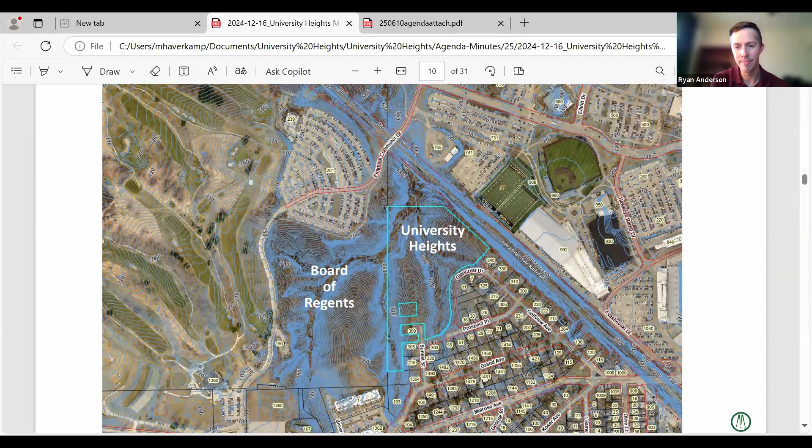Next slide. I mentioned we did walk the existing social trails - those are marked out in dark green dashed lines here. We have GPS software; a lot of bicyclists may know Strava. We used that to mark the trails, so we could understand what it feels like to walk them, but also see what that looks like when you lay it across an actual map, which is what we use for our design efforts.

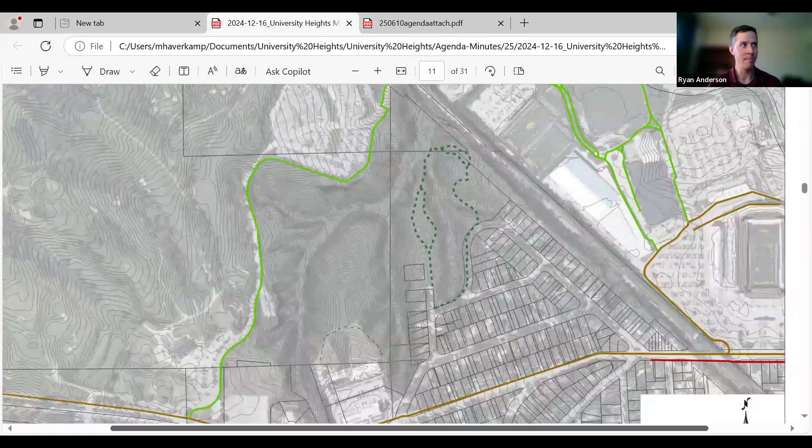Of note, the existing trail follows along the center spine of existing topographic lobes out here, because that's easier to lay trails out on. As we talk about sustainable trail infrastructure from an environmental standpoint, it's maybe counterintuitive, but it's actually better to land on either side of those lobes, because water moves faster across those areas and isn't effectively funneled down the center line of the trail, which can cause long-term washout.

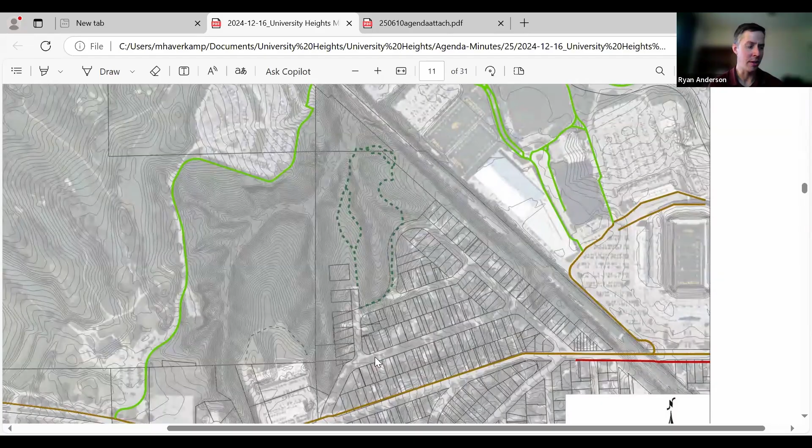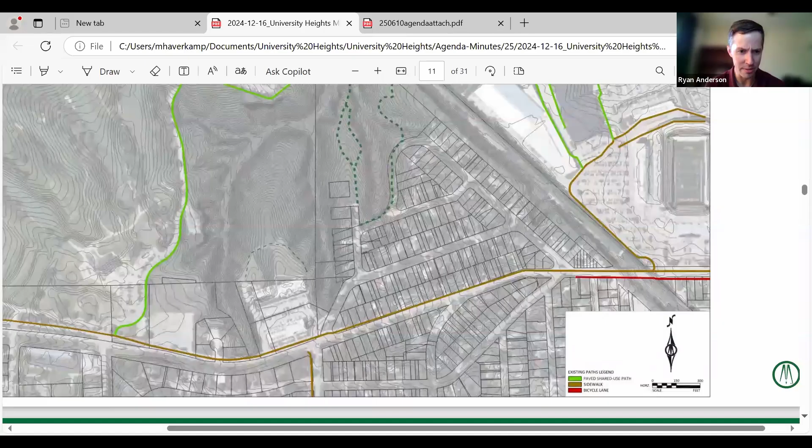So again, that's just what's out there today. Next slide. One moment - worth noting, the lime green to the west is an existing off-street trail that wraps around the forested area there. Also showing some other local off-street trails in brown on Melrose to the south - some adjacent trail connection opportunities.

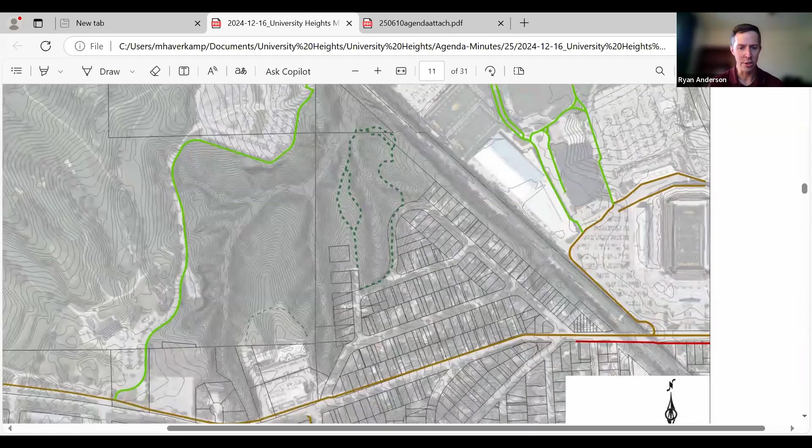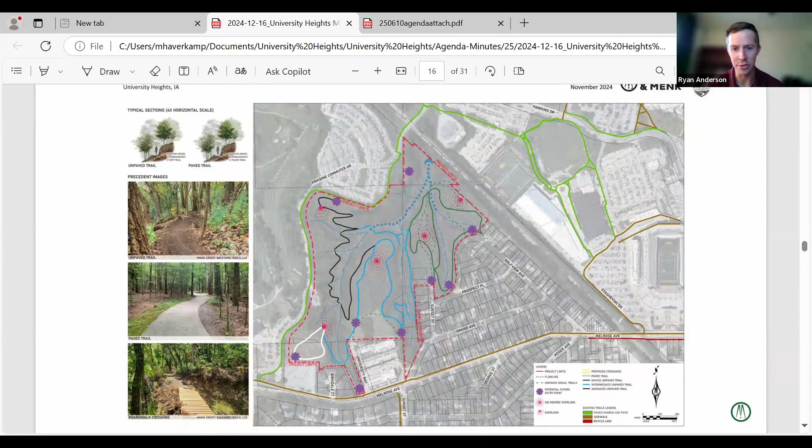So this was our first crack at laying out different trail alignments with consideration of topography, existing water, those different view sheds, and then of course the different site points of entry. Let's jump to the next one.

You can see there's some similarities between these two. Generally easier trails on the east portion of the site. The blue trails here in the middle are significantly different. They originate from either side of the northern One University Place building, and then basically loop out to the end of that lobe where there's a nice view shed opportunity, and then loop back. What's nice about that is there's not much water crossing. And then again, with the black trail here, instead of following along the low point of that ravine, trying to get up a little bit higher and work around these different areas closer up to the road.

I should mention on the left side here, just some examples of what a dirt trail looks like. That'd be something like you'd see in the green there. Paved trail in the middle is concrete or asphalt, and then boardwalk crossings in the bottom left there. That was actually constructed by Backyard Trails. Forgot to mention also at the northern limit of Sunset Street, there's a white paved trail. So it was important to us that there was a paved trail portion as part of each of these concepts that'd be fully ADA compliant. And so that was another primary differentiator between this concept and the previous concept one.

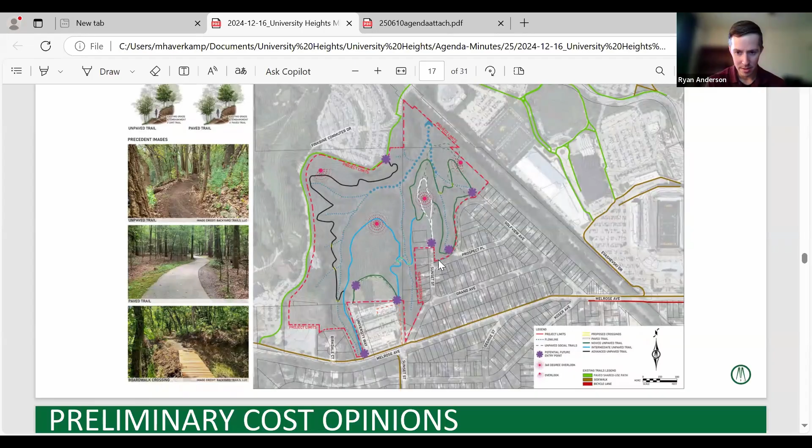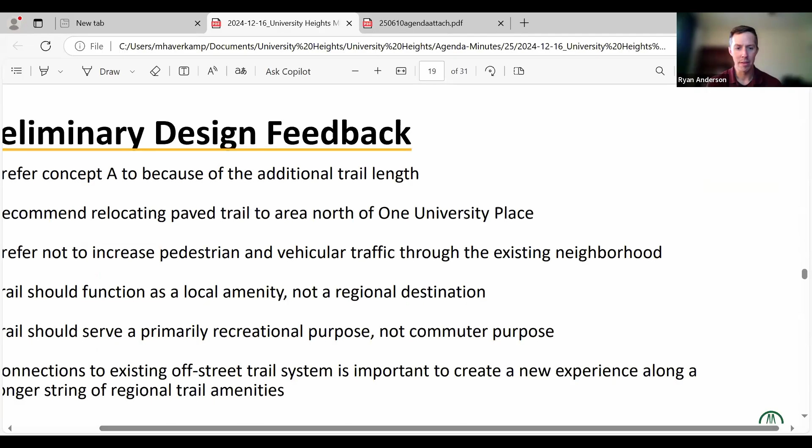If you jump to the next slide. When we talked through the two different concepts, here's where we kind of landed for direction in the final. Again, A had more length. Figured if we're going to do this project, we should do our best to optimize what we have and get as much trail in as we can. There was a strong preference to get the paved trail away from that southwest corner to facilitate future development in that area. And so that trail actually was proposed to be relocated on that loop that's north of University Place, which you'll see in the next concept here.

There was a preference not to increase pedestrian and vehicular traffic through the existing neighborhood. So we're not necessarily highlighting on-street trails on already narrow streets through this neighborhood. Don't want this to feel like a neighborhood that's also a highway. So the trail should function as a local amenity and not a regional destination. I think Josh kind of prefaced that as well.

There's a lot of really great mountain bike opportunities in this area. And while this will be a great amenity in addition to that larger system, this is different than something like the Ice House, where it's less mountain bicycle centric, really more about getting people out and into the woods and able to go for a walk. That's important to recognize, I think, with the University of Iowa as well, with all the students that navigate these different areas, trying to design in a way that is, again, socially sustainable, making sure there's not people moving at high speed on a bicycle next to people that are not while they're walking.

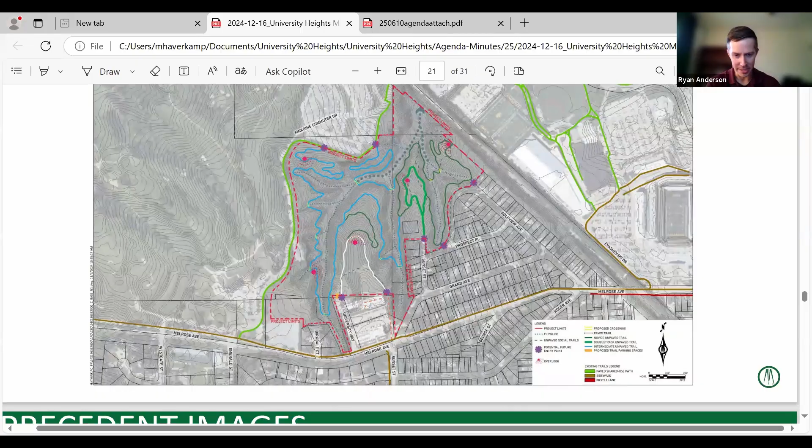So this is kind of the same song, but with a preferred concept. It's really a melding of concepts 1 and 2 previously. I'll highlight in particular that white upside down U shape extending from the east and west edges of the northern residential building.

That seems to be an area where it's easy to provide some level of vehicle access on the west side, highlighted in orange. So you have a truly accessible parking space which lets you get out into the woods and make a return. That also interconnects with the larger trail system, which has been aligned with existing topography to be both sustainable and cost effective, really optimizing the amount of trail without having to construct a lot of boardwalks or navigate steep slopes.

You'll see there's no longer any black on here, again thinking about making this available to a wide range of users, wanting to top it out at that blue designation. The dark green are going to be more similar to what's out there today, relatively narrow dirt paths, maybe 3 feet wide, single track.

We did really like recognizing that the access point off of Sunset Street is one of the primary existing points of entry for neighbors in the area, so that's a bolder, lighter green that would be double track, 6 feet wide compared to 3 feet wide. Again, if you're inviting more people into this space, creating a simple loop system lets them go out and come back, walking 2 by 2 or crossing paths with another without stepping off the trail and back on.

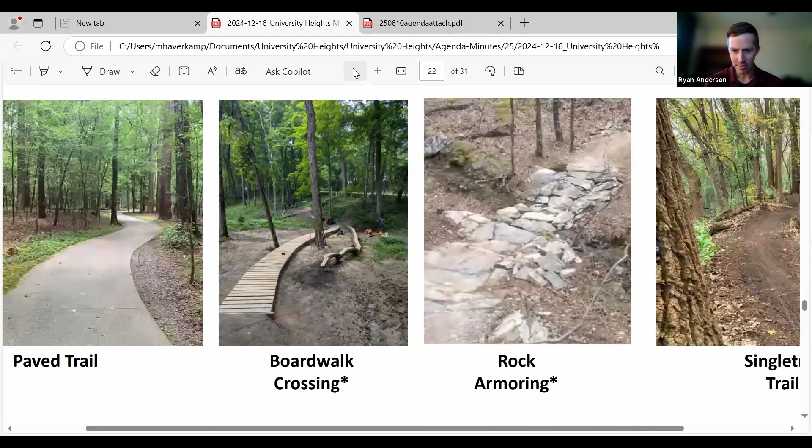Again, just a few precedent images. There's still a number of creek crossings in here that can be achieved either through a boardwalk crossing or through rock armoring, depending on the length and intensity of the stormwater movement.

But again, there's that example of what that paved trail could look like north of University Place. Then again, single track trail on the right, which would be essentially doubled in width for the area of Sunset Street.

Ryan, I'll just jump in quick. For any of you listening or in the room who haven't seen this sort of trail system or these setups, you can go see them at any time in Coralville. They have a tremendous number of these along Woodpecker Trail, right at the Tom Harkin Trailhead, going all the way out by the baseball fields.

They've used similar partners, Bolton and Menk and Backyard Trails, to do a lot of their trail development, and have both boardwalk and rock armoring in some of these lower, wetter wooded areas.

Yes, and Ken was very happy to have an engineer on board. Those two pictures in the middle were both done by Backyard Trails, but he really valued our in-house expertise to do more of a hydrologic study and make sure the armoring is an actual engineered connection across the water. So we've really got whatever level of intensity of design or implementation is required covered on this team.

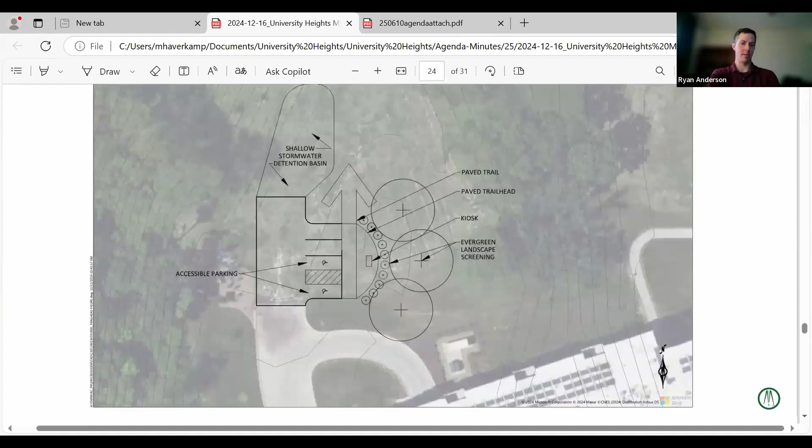To that effect, this is a quick trailhead mock-up. This is down at the end of the drive, north of the Northern One University Place building. You can see the driveway that connects down to the lower level parking. It's really a stub of 4 different parking stalls here, and either 1 or 2 of those could be made accessible.

We picked this location after looking at a number of different options throughout the project limits. This is both level and already set up to respond to traffic. Most of the roadways that dead end in the neighborhood to the east have pretty quick drop-offs once you get past the end of the road. So we wanted to tack on to existing infrastructure to save on costs, but in a location that was also pretty level, to make sure we're able to provide that accessible design and make it easy for folks to get there.

So in addition to the parking stalls here, there's a semicircle for that kiosk to be located. And one of the considerations we built into this plan was some robust evergreen screening.

So making sure that any headlights projecting directly east from here—and as that building is oriented slightly to the northeast instead of true east-west—there's no opportunities for headlight light pollution to spill out from this trailhead. That'd be achieved through layered vegetation or other means defined during final design.

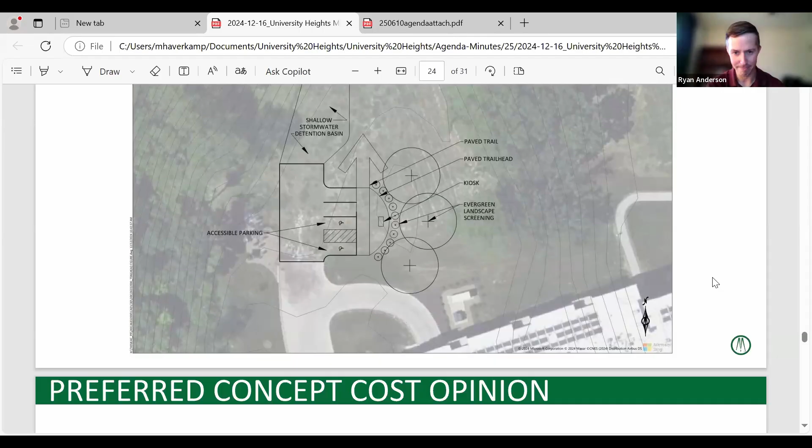So this concept has a little more trail than either of the previous two. It also has the addition of this parking lot, which wasn't included in concepts 1 or 2, or the trailhead. And that's where you see the increase in cost by approximately 100,000 compared to the previous two.

We feel this is a design that's much more in alignment with accessibility considerations. It's not a separate element as part of a larger design—it's really integrated and serves as a jumping off point for the rest of the trail system.

It also includes the stormwater detention basin, which is not included in some of the other concepts.

I'll mention at this level of design, we do have that 20% contingency baked in, but all these different costs are truthed based on either past bid work that Bolton & Menk has done or built work that Ken with Backyard Trails has provided. He reviewed these in depth, as did we, from an engineering and a trail designer mindset both, and we feel like we're providing a conservative estimate here.

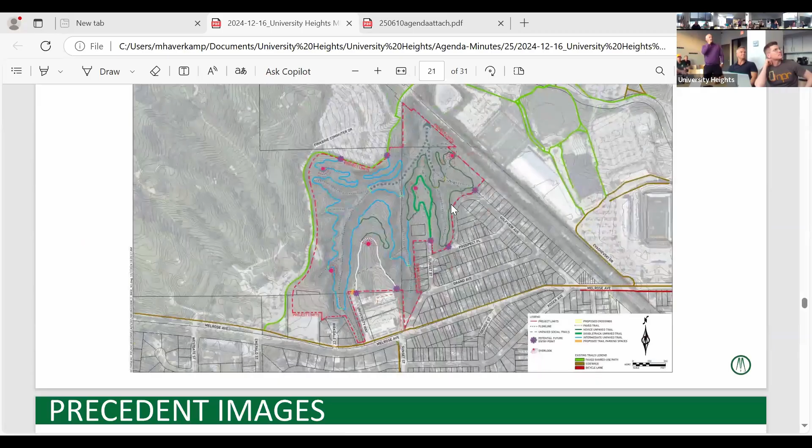The blue one - you want to talk about the Ryan on the blue one a little bit? That was more of a kind of aggressive trail, right? That's right. Our goal in this concept was to make these as easy to walk on as possible. This is also at a master plan level, and so we navigated these slopes together, wanting to err on the side of being conservative in the way we're representing these routes.

It's possible as we get further into the design process that they may be able to back down to a green, depending on the width and the cross slopes we're faced with as we do these switchbacks. In particular, the areas off of the commuter lot where you're switching back across some pretty steep topography on the north side of the forest.

Those are the ones that kind of set the color for the rest of the trail. They try not to change up the color of the trail once you're on it. I would say more than half of the blue trails here will probably feel like green, but there are some water crossings as well which we want to represent, so these are going to feel a little bit different, at least in areas, compared to the actual designated green trails we had further east.

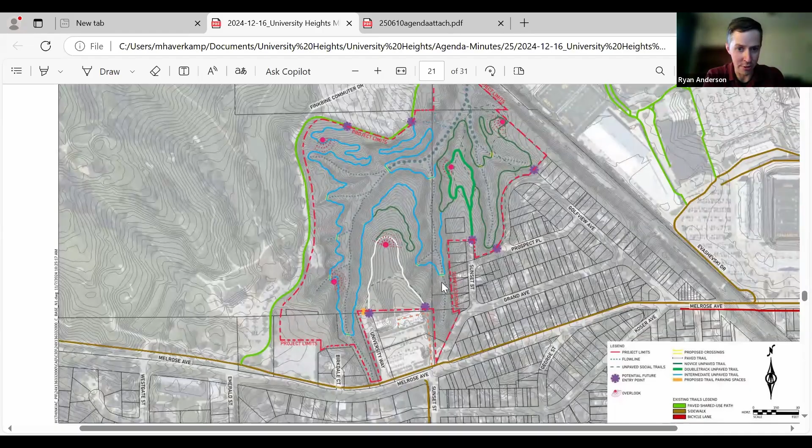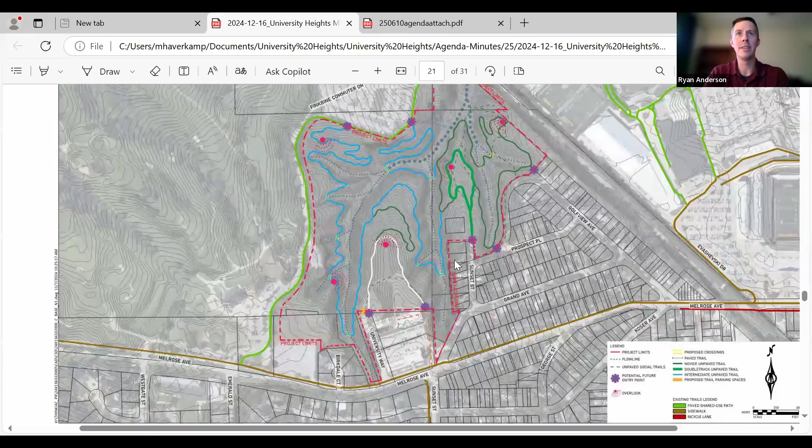Ryan, could you speak on the length of the trails? Could you remind me what the lengths are? Yeah, absolutely. I don't have it pulled up for individual segments right now, but in our final concept, we have about 2 miles of single track across the blue and the green, and then about a quarter mile of double track.

I'm very excited about using this property, and I have myself been walking it quite a bit for the last 2 years. Basically, since I started thinking about retiring in '22 and then did retire, I've been out there a lot, and I'm a bird watcher. I don't ride bikes, so I'm actually more interested in it as a walking trail than as a biking trail, but I understand we need to have the multiple use. And I think the double wide trail, I didn't like the sound of that at first, but obviously there has to be some handicap accessible area, and I certainly salute you for doing that.

What I wanted to ask is there was some mention about lighting earlier, and I wondered if you were thinking there would have to be lighting in that portion of the trail. I'm a little worried about the impact on birds if you do anything like that, but is that something that's contemplated?

Other than that, I think some interconnections with the trails would be nice, so that there's some changeable option, so you can do the long version or the short version. Right now there's a little bit of that. So those are kind of my questions, but I really am very glad to have us doing something.

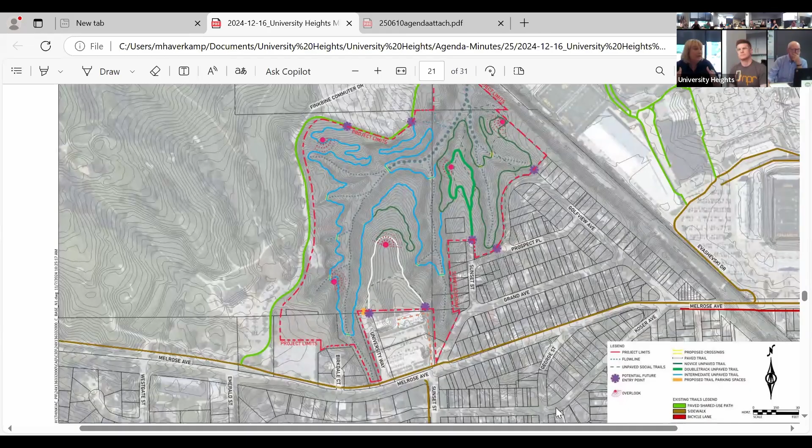I think this is helpful to the group to get some feedback. We have done in the past, like open houses, and had things set up here where people can walk through and comment. I'm sure the council will work towards more public input - the city wants as much public input as possible. Thank you all for coming tonight, that was a great presentation.

Appreciate it all, and appreciate you coming in on Zoom. I don't let my husband come very often, but he's kind of passionate about this. Thank you, Josh, I couldn't stop him - thank you, Josh, so much, and Ryan. It really is amazing how technical this is. I did not appreciate how much work goes into it. When you walk it, it's impossible to walk a lot of this. To know the topography and know where the trails will go, I think is pretty amazing, so appreciate it.

Well, we'll wait to hear from you. Everybody's got my number, I talk to Nick and Tim all the time, so enjoy whatever additional help we can provide, and when you're ready as a community to move forward, we'll be right there with you. Thank you, appreciate it so much. Thank you for the support last month. So Iowa City, it's in my report, I think the city contributed to our food and beverage for our bike project. Yes, they did. So thank you very much for that.

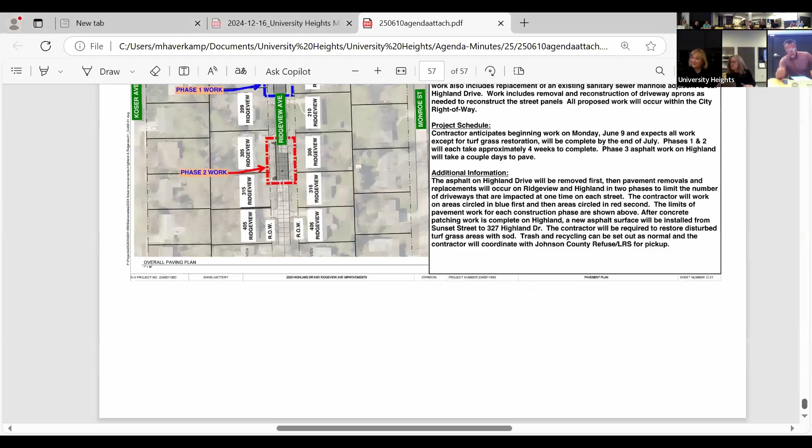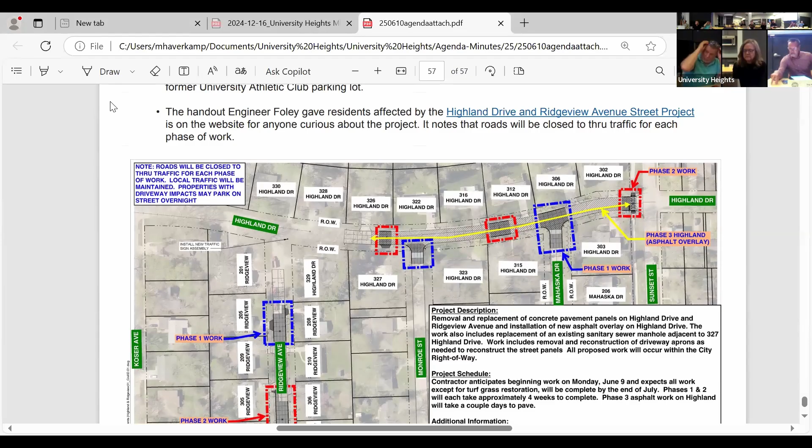Okay, is there any announcements? One quick item mentioned in the city treasurer report that Ryan didn't mention - SLS, the payment for the work on the permeable pavers. That work was done, and I know council's discussed it before. Ryan and I went out there and it did not meet our expectations, so payment has been withheld for the time being. But we came up with a plan with SLS, so if you drive by and see them out there working on it again, that's because they're going out to remediate the work - I think it was more of a miscommunication than anything. Once it meets our satisfaction, we'll route payment again. I know it was discussed by council before and the work was supposed to have been done, so in case you see them out there again, that's what's going on.